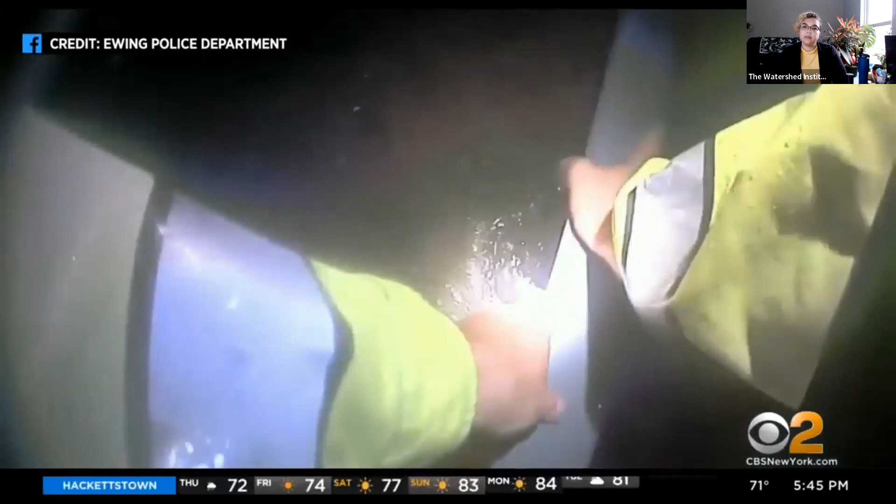Woman's life in the raging floodwaters last week. We showed you the body camera footage last night from Ewing Police in Mercer County. Now that officer is explaining what happened. CBS 2's Alice Gaynor reports. Body cam footage from police officer Justin Quinlan shows him walking through waist-deep water last Wednesday night at Whitehead and Ewingville roads, responding to a call of stranded drivers. He saw about 7 cars with people making their way out of the water and asked if they needed help. They said, no, we're all good, but that lady over there needs help. I didn't see her at first, so I'm glad that they were able to point that out for me. I shined my flashlight towards her, and I could see she was just holding on for dear life. He says he straddled the guardrail and made his way over to her. Hold on, dear. Don't move, okay? All I could think about was getting over to her and making sure I got my hands on her just to keep her in that place. I didn't want to lose her. Are you injured right now? No. Okay, swing your leg up over this guardrail for me.

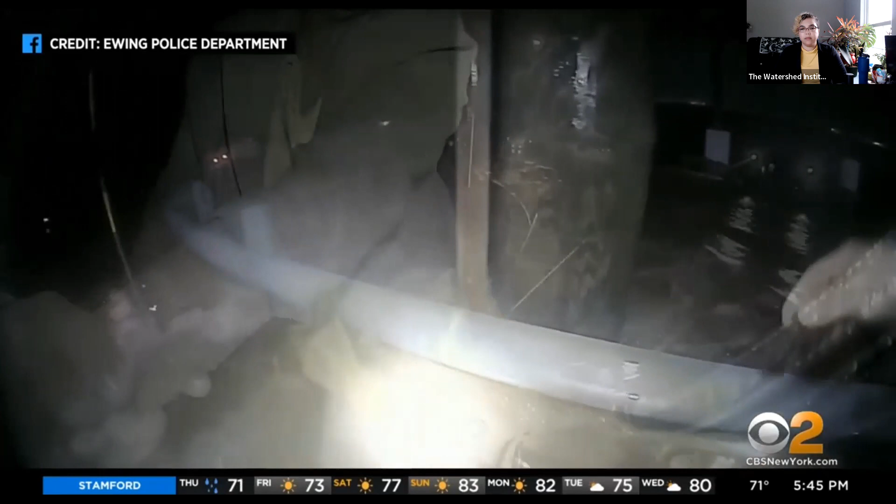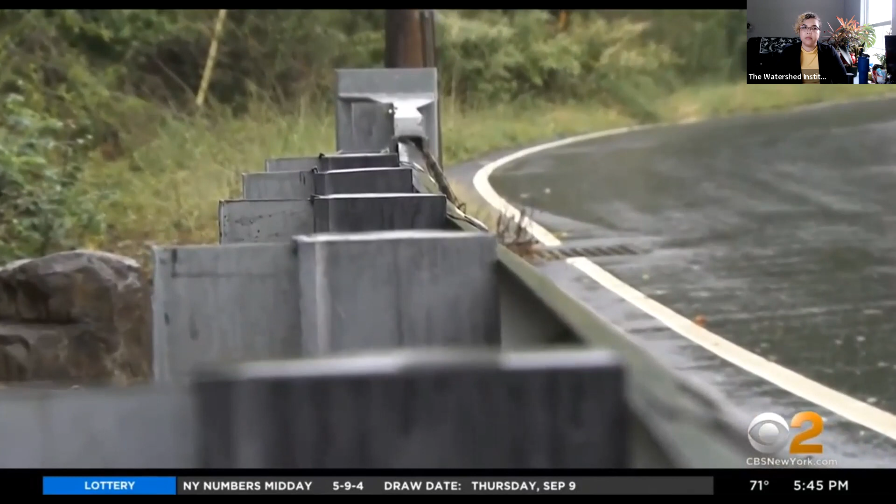Officer Quinlan says though he felt he could walk them out of the cold, fast-moving water, he decided to stay put and wait for firefighters. I don't know what's moving with this water, so I don't want to try and walk across, okay? God forbid there's a big log that comes loose or something like that. We said a couple prayers together and I just kept reassuring her that we're going to be okay. Someone's going to come help us. The body cam footage provided ends here, but Quinlan says 25 to 30 minutes later, firefighters came, put life vests on them, and used a rope. The woman, whose name he didn't get, was put into an ambulance to go get checked out. If she is watching or she's listening, I'm glad she's okay. Officer Quinlan also has this message to all drivers. When you see that water, it's better to just turn around. There's no point in trying to drive through it. He says he's happy the video shows the good side of police work, but hopes it also shows people why you should stay off the roads during a storm. In Ewing Township, Mercer County, Alice Gaynor, CBS 2 News. For more information on how to donate to Manville VF.

All right, I am going to share my screen once more. Bear with me as I deal with technology. There we go.

So I show this so that we can think about the bigger issues behind building a rain garden and taking care of our stormwater locally, that lives are literally at stake.

So Kendra, before you keep going, sorry, there's still a box kind of covering your slide. I'm sorry, friends. Just want to make sure that there's not a void of information. Thank you. I apologize.

So how did we get to this point? Well, technology, there we go. So in this figure, you can see observed precipitation changes from 1991 to 2012. The darkest green shows an increase of precipitation events of more than 15%, and the dark brown shows the opposite, a decrease of greater than 15%. Over this time span, our region is having a net increase in precipitation events.

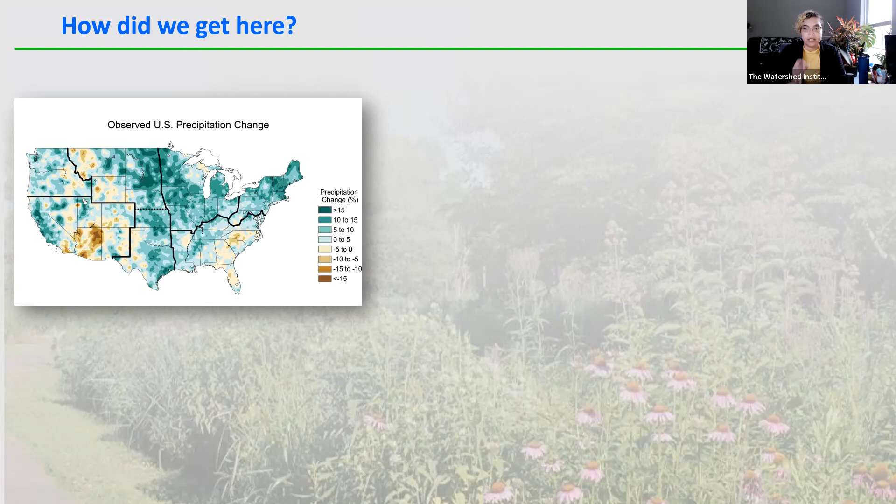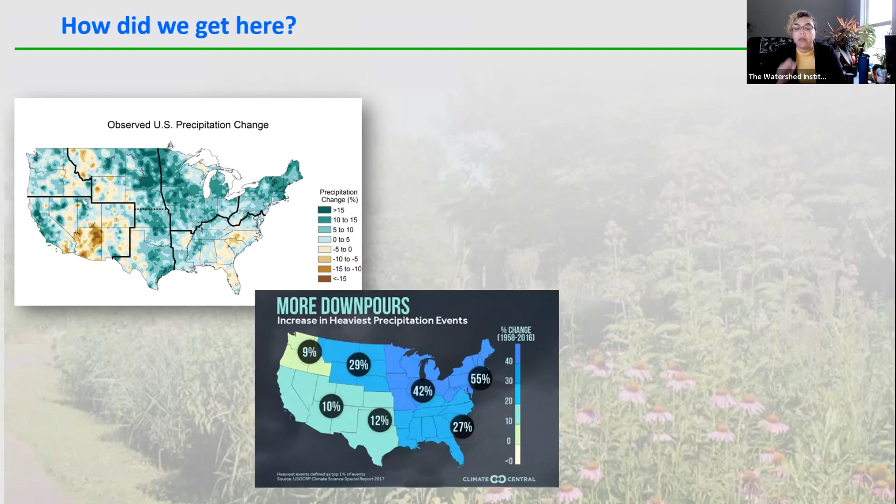Secondly, we're not only having more precipitation events, we're also having more heavy downpours in those events. So it's raining more often, and when it rains, it rains. And then finally, our land use has changed. So this figure shows changes in land cover from 1972 to 2010, with red being developed land. Developed land means more hard surfaces that don't allow water to penetrate. We call these surfaces impervious cover.

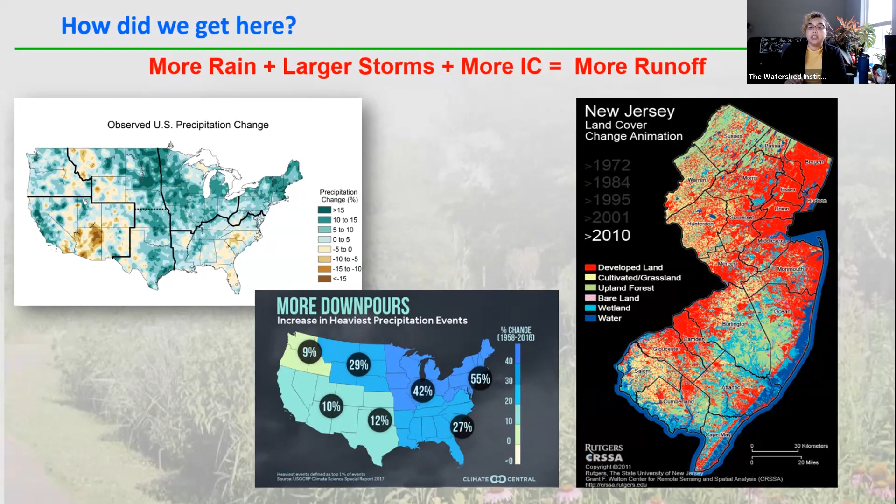Now, the result, more stormwater, and it has an increase in quantity. More stormwater, and as it increases in quantity, it gains strength and can cause serious flooding or stream bank erosion, which will destabilize the stream and provide less of a protection for communities nearby.

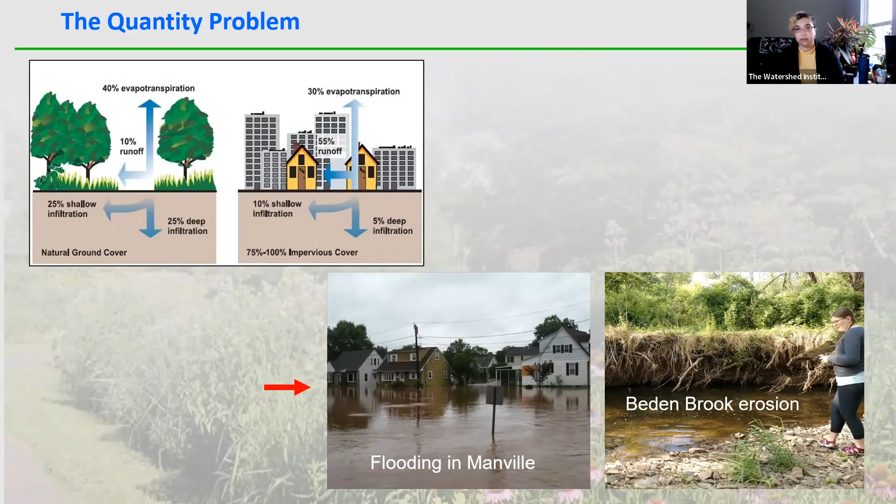The quality problem. The runoff is a collection of all the small solids and liquids that we release onto our roads, yards, home, workplaces, what have you. All of this is funneled together as stormwater, which is an issue not only for the health of the stream and the ecosystem, but also for drinking water, fish consumption, and recreation. In fact, most of our waterways aren't healthy enough to support various aquatic life, or we don't have enough data to make a conclusion about it, which is a different kind of problem.

And funny enough, that flows northeast into the Assunpink Creek and then eventually goes down and joins with the Delaware River. So Ewing is a special situation where it is an upstream community to those in Hamilton and Trenton, because what it puts in the water impacts them. But on the other side, it's actually an upstream and a downstream community when you're looking at the Delaware River.

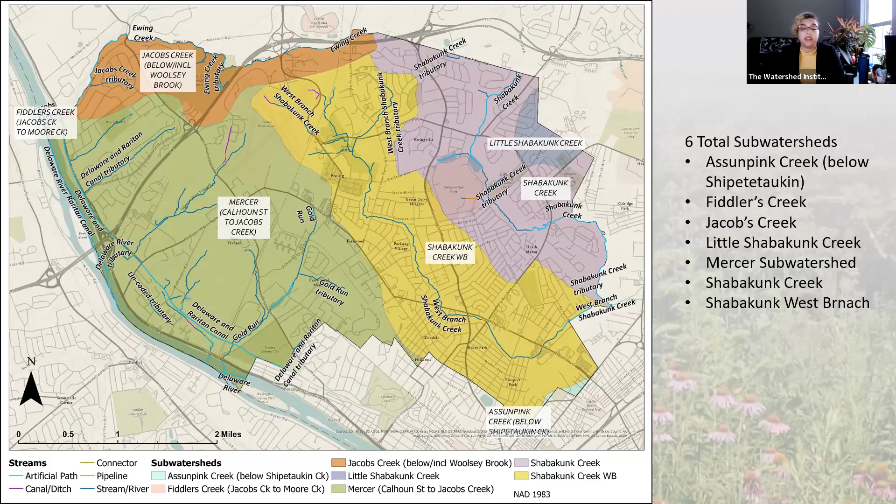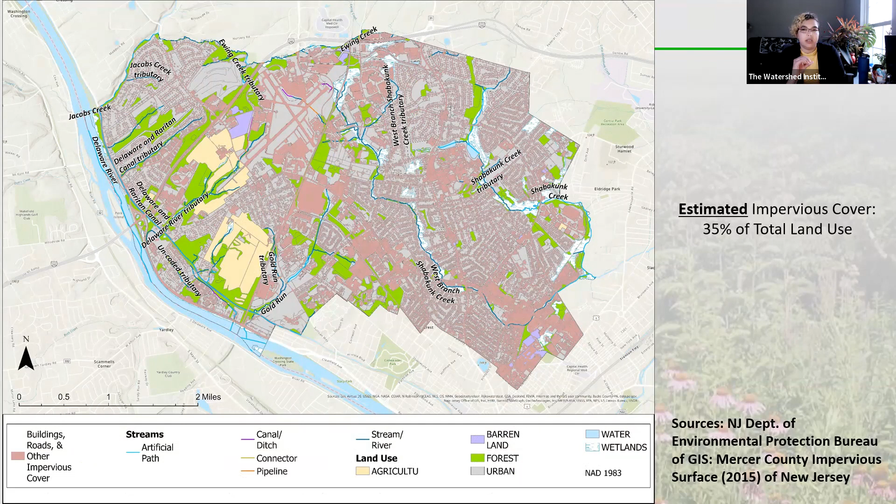So you want to be below 10%. That's where you are not having impact on the water quality or quantity. And as you go higher and higher, you go from impacted water systems to not supporting life. At the estimated 35%, Ewing is hitting the point where it's not going to be able to support the aquatic system.

All right, so how do we move away from this? Away from what we have here in our image, which shows our old style of managing water. Gray infrastructure, meant to hold water and do not much else. It's not going to address the quality or the quantity issue, but green infrastructure will.

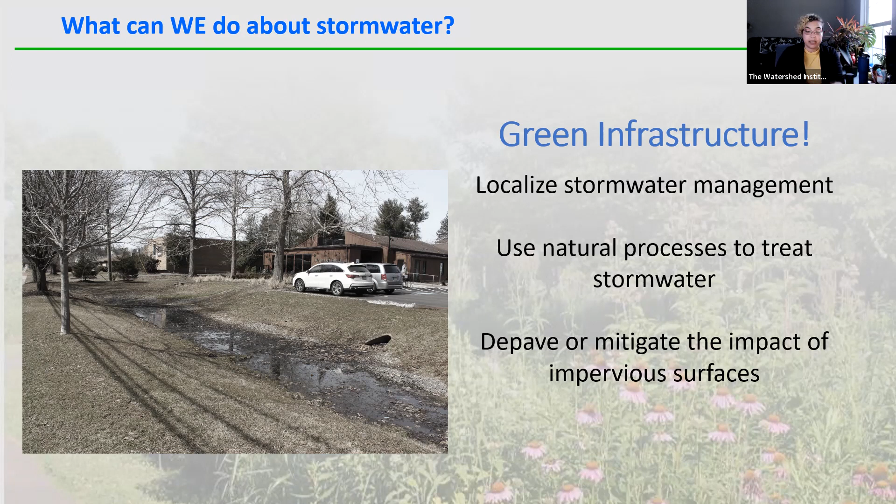It's a means to localize stormwater management, use natural processes to treat the stormwater, and it's steps to depave or mitigate the impact of impervious surface. So by working with the topography and utilizing local plant species that thrive in intermittent flooding, we can transition from a space like this to this.

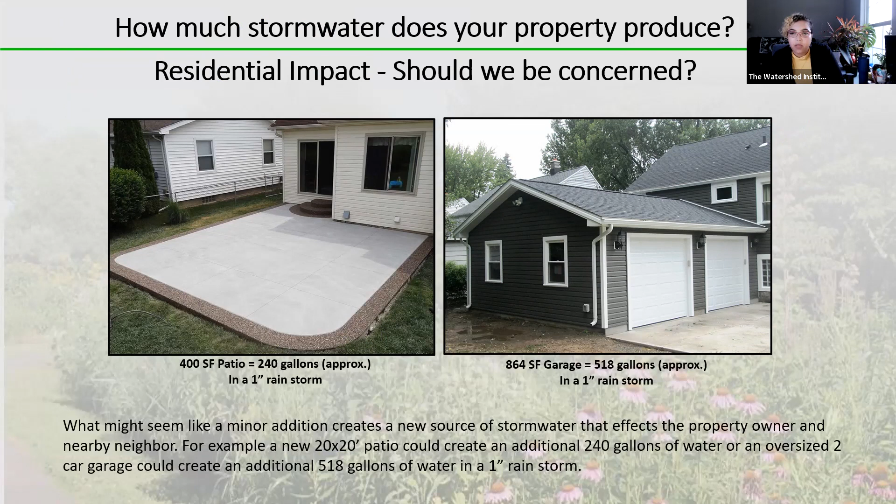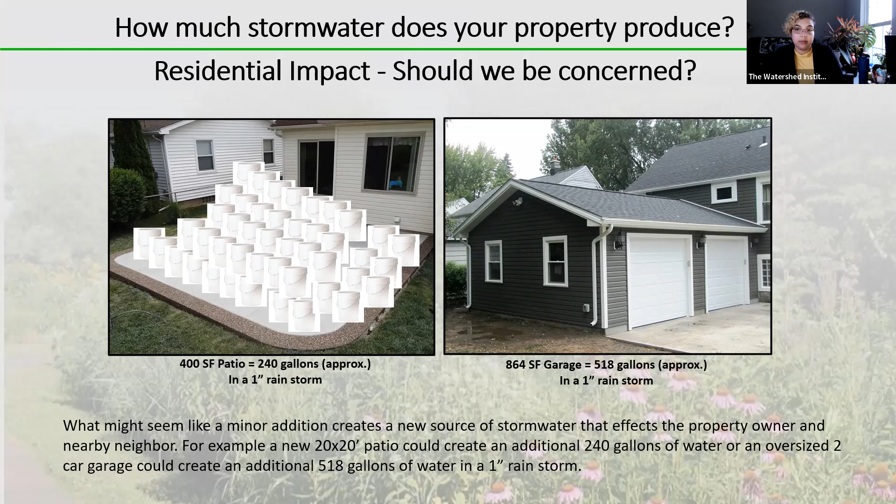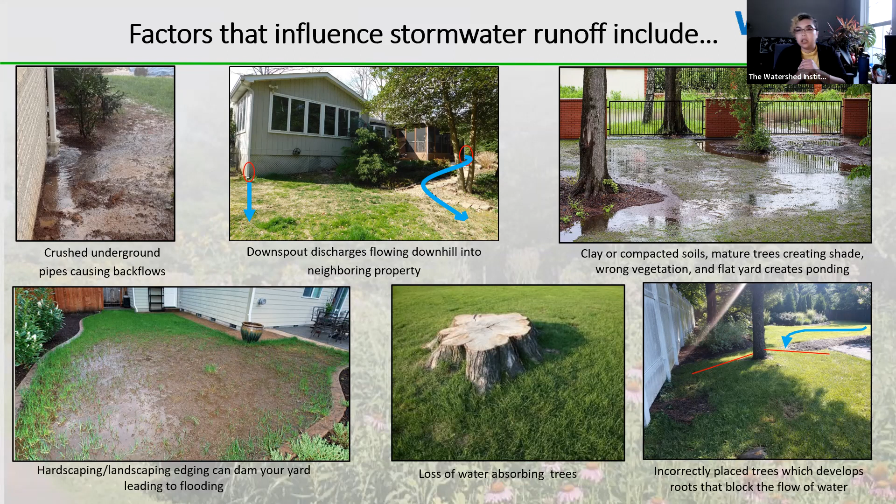And that's not the only issue that contributes to flooding. It's not just impervious surfaces. It can be things like broken or poorly angled downspouts that are causing ponding in your yard, compacted soils that refuse to take up the water and prevent it from infiltrating. Or you might be flooding yourself with landscaping that's edging up on the corner of your yard and holding the water in. Or maybe it's a loss of trees, so we no longer have those great sponges.

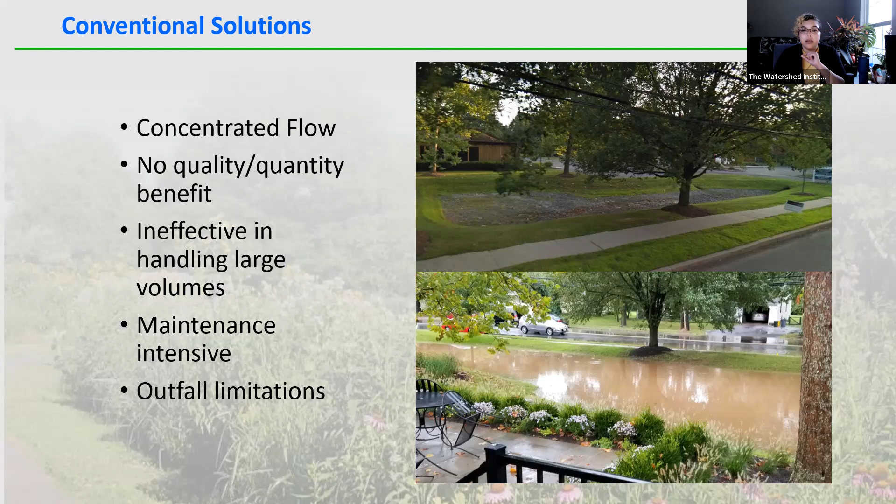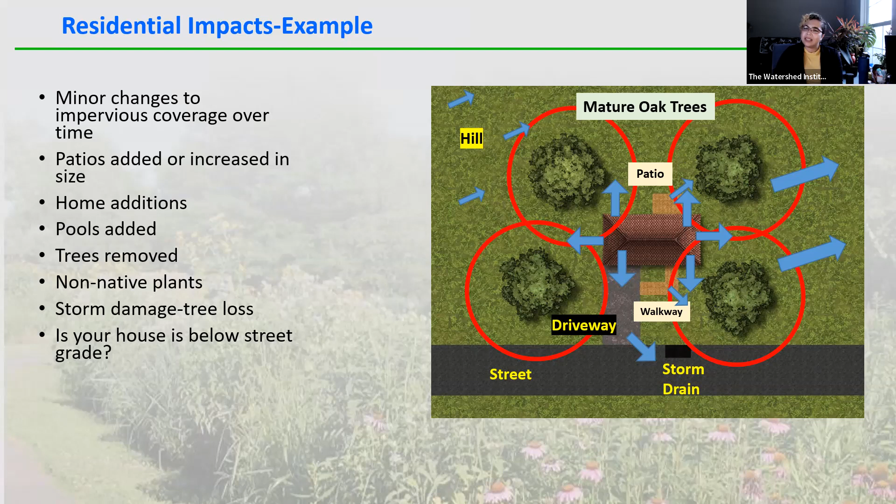And the total is 1,797 gallons of runoff because of this property in a 1-inch storm. But it all flows away from you. It all flows through downspouts. And in fact, let's think about those trees a little bit more. Because if you hop onto treebenefits.com, it tells you that those beautiful mature northern oaks capture just about 24,000 gallons of water each year. So all of them together are giving you 100,000 gallons of water soak-up, just as they're out there doing their thing. Little side note, the green ash trees absorb about as much as the northern red oak. We should consider what we're losing when we lose them to disease and pests in our area. Just my little 2 cents.

So things started to change. Your family started to grow. You were spending more time at home because there was an international pandemic. So you decided to build onto your house and improve it. So you added an addition. That's 1,600 feet. That's going to be another 960 gallons of stormwater. And then also you took out that tree because it was in the way. And you added a pool and a terrace. That's another 1,200 gallons of water. And then another tree had to come out. And if you have a pool, you got to have a pool house, right? So for 800 square feet, you're making another 480 gallons of water running off.

And with all that work you did in the back, it seemed a little weird not to do some sprucing up in the front. So redoing your sidewalk, you changed it a bit. So now it's 240 square feet instead of the measly 45. And now it's going to push off 144 gallons of stormwater. And unfortunately, nothing lives forever, and trees are included. And that tree in your front yard died to disease. So you managed to create 4,640 additional square feet of impervious surface, which translates to 2,784 gallons of water in a 1-inch storm, plus the loss of your 3 trees. So you no longer have those 75,000-gallon sponges in your yard. So what used to be a charming little house that basically took care of its own stormwater is creating a problem for those downhill in a very big way.

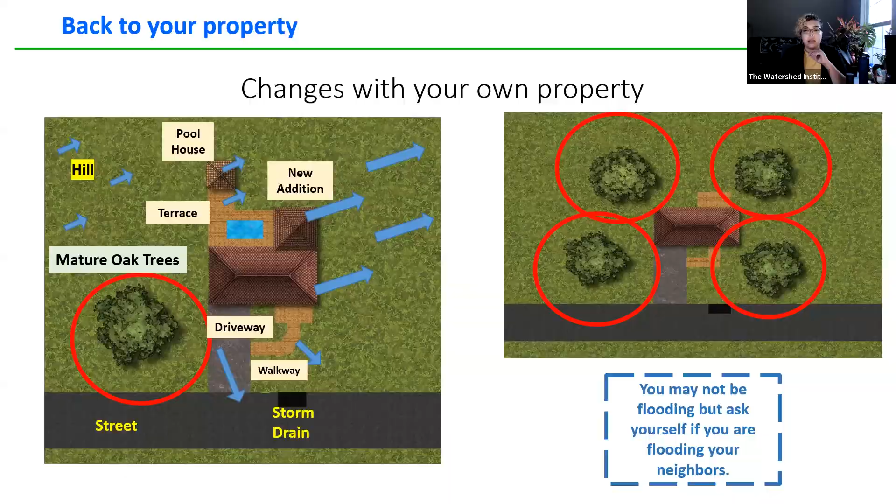So all of us contribute. This isn't a problem that's just related to warehouses, just related to developers, just related to people that want a pool and a pool house. It's all of us. This small 2,800 square foot roof in a 1-inch storm lays off 1,680 gallons of water. You would need 30 and a half rain barrels to hold this in a 1-inch storm.

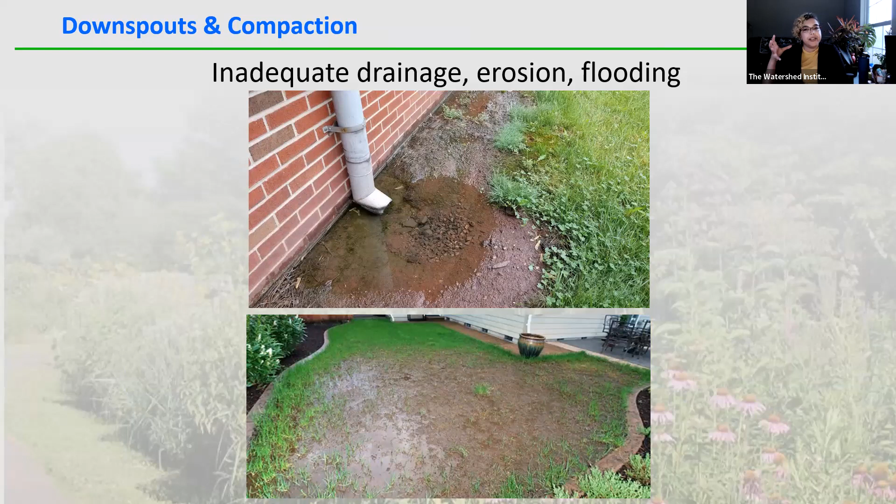In fact, a lot of our downspouts aren't pointed in the right way. So sometimes we're flooding ourselves as we lead to ponding, or we're damming up our own yard with landscaping, causing the water to stay in. So some of it is not about the impervious surface, but the layout around us.

So there's lots of things that can affect stormwater. All right, it's your drainage areas, the total amount, precipitation, land cover, but issues like your type of soil, your slope, the type of flow, whether it's a strong sheet flow or concentrated, those all are going to have an impact. So the importance is everybody making that effort. And you all are taking the step right now by learning about rain gardens.

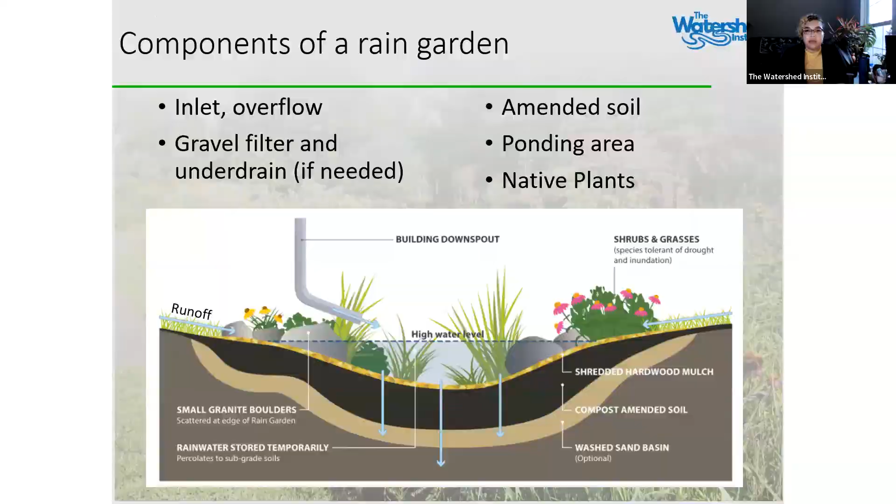So I want to take a little bit of a breather, check the chat for any questions, and say thank you for your time. All right, so. Looks like we do have one question. Yeah, so, oh, and I want to be on my question slide.

So, all right, so are there types of hardscape that produce less runoff, like pavers with spaces in between versus solid cement? Yes, there are options. Obviously, the more you have something that can allow the water to infiltrate, it's going to be better. There's lots of green infrastructure related landscapers that can help. While Olivia presents, I'm going to try to find a quick reference and drop that in the chat that can talk about some of the different types of impervious surface and pervious surface alternatives.

And like everything with this, there's going to be a compromise. There's a reason why humans have structured it so we have these hard impenetrable surfaces for roads and roofs, but it's time to consider alternatives.

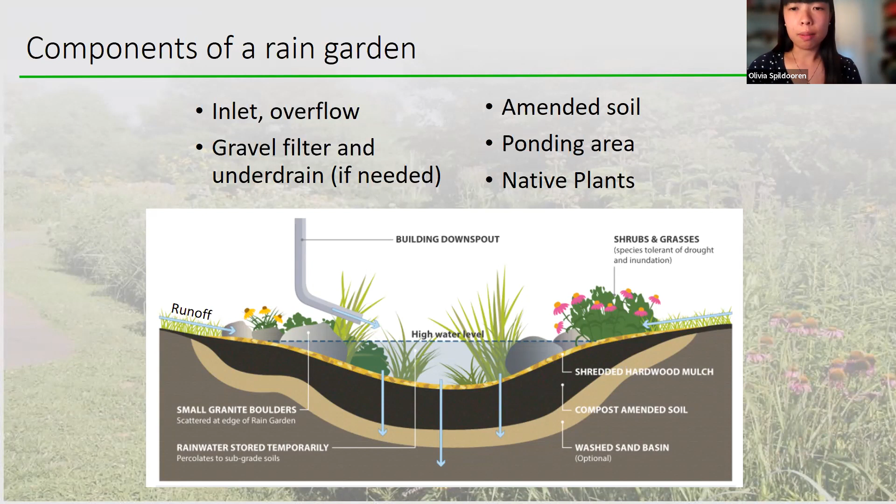Actually, not finally. So we have the rain garden plants, which I'll talk about more in future slides, but you're also probably wondering, it says high water level and what that means. You can kind of see where that water level is. It's the whole section of the garden that is exposed to the elements, and it goes to the deepest part of the garden. And this area is supposed to drain within 72 hours, so about 3 days, to avoid problems with stagnant water like mosquitoes. And the maximum ponding depth is usually around 6 inches, but we'll talk later about how that also depends on your soil type.

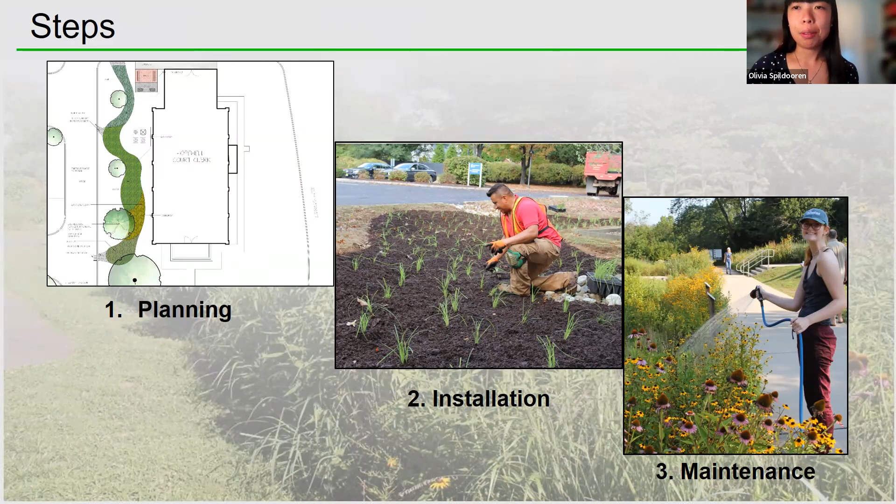So that diagram might have been a little intimidating or daunting if you're thinking of starting a rain garden project on your property, but I'll assure you that it's much simpler than that diagram. And there are 3 major steps involved in the creation of a rain garden. Each one we'll go over in some greater detail. So we have planning, installation, and then everyone's favorite, but also the most important, maintenance.

So first, in the planning stage, Kendra did a good job of giving some examples of homeowners' dilemmas that have happened, or just giving an overview of where the water is running. But obviously we're not above the ground. We're not like birds. So we have to walk around during a rainstorm, get your rain boots on, get an umbrella and see where that water is going. This is a really critical part because you can't decide the best place for a rain garden without knowing where the water is going to flow.

So first, where do you see it going? Where is it coming from? That's also a really important thing to note. Follow it. Is it ponding in your yard somewhere? Is it actually flooding your neighbor? Or like Kendra said, also, are you flooding yourself?

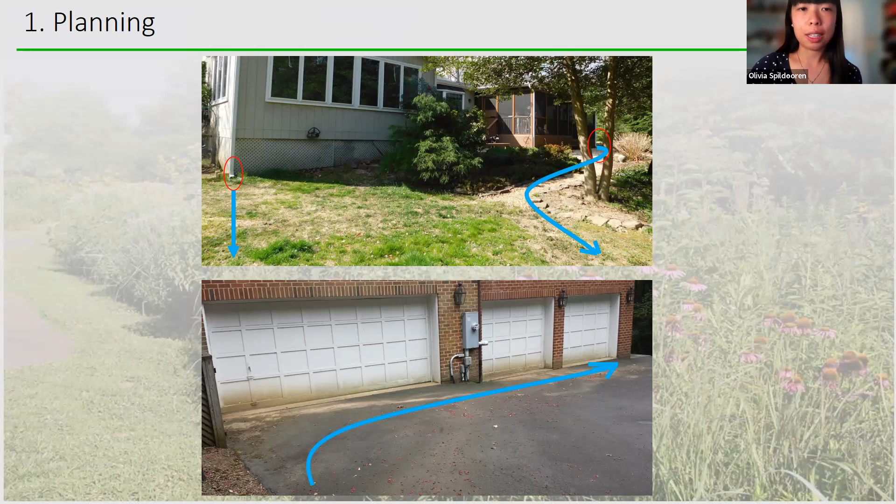So this is a picture I think she showed before. The top is a home that is flooding their downhill neighbor. You can see where those arrows are going and where there's some erosion in the turf grass. And this is actually coming from the homeowner's downspouts, creating this kind of river that is flooding their neighbor. And then the second image is of a house that's being flooded by their own stormwater, which is flowing down their driveway from their house and right into their garage.

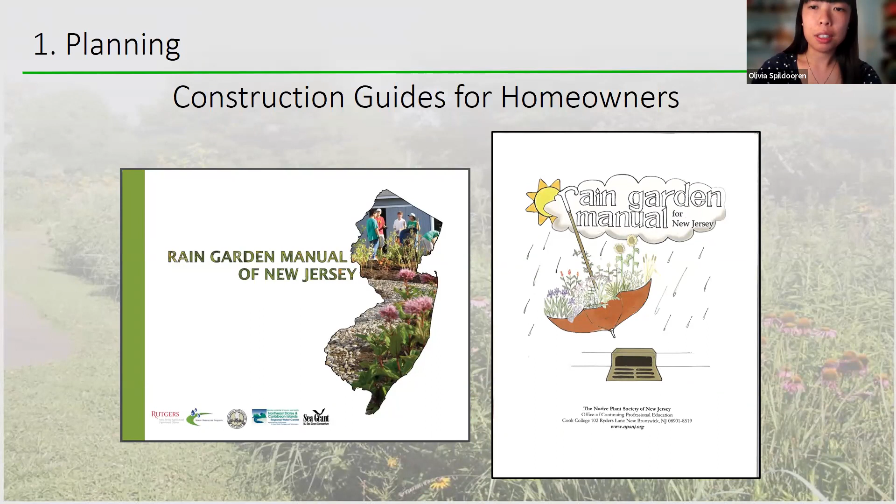So once you follow the water, know the source and the spot of where the water flows, it's time to refer to some manuals to start preparing. You can use Google to find either of these manuals online in virtual form. They basically tell you the exact same thing, but have different illustrations, both of which I think are very helpful. One of these is created by Rutgers, and the other is by the Native Plant Society of New Jersey.

You'll want to make observations to determine where that water is moving. And also you'll want to focus on where you're going to be most concerned. Because as you saw in those diagrams, the water from the 4 directions that your house slopes is all moving down, but you need to find the area you're most concerned with.

And you'll also want to think about when you install your rain garden, again, the direction of the flow. I mentioned an inlet and an outlet of the garden. So you want to make sure that the water is mostly going into the inlet, is able to be collected and absorbed in the rain garden, and then any excess is outletting either downhill or somewhere else where it won't be causing issues for yourself or other people.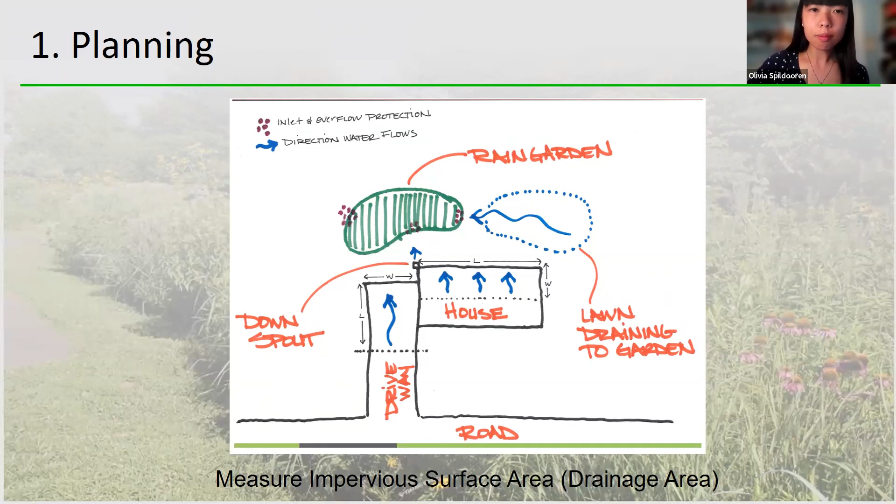Then refill the empty hole again with water and measure the depth of the water with a ruler about every hour for at least 4 hours to see how many inches of water are drained. About 1 inch of water draining per hour is an indication of good soil for a rain garden. If all the water does not drain in 24 hours, the site might not be appropriate for a rain garden, or the soil will need to be amended. As most of us in New Jersey have heavily compacted clay soils, you will most likely need to dig down deeper and have amended soil that has been specially created for the rain garden.

Also, you'll want to research if you have a high water table. So if you dug down 1 foot and it was muddy already, a rain garden might not be the best, because we don't want it to be interacting directly with the water table. So in that case, you might want to plant a vegetative swale, which is more like superficial grasses that have deep roots to do the infiltration work, but we're not digging down into the water table.

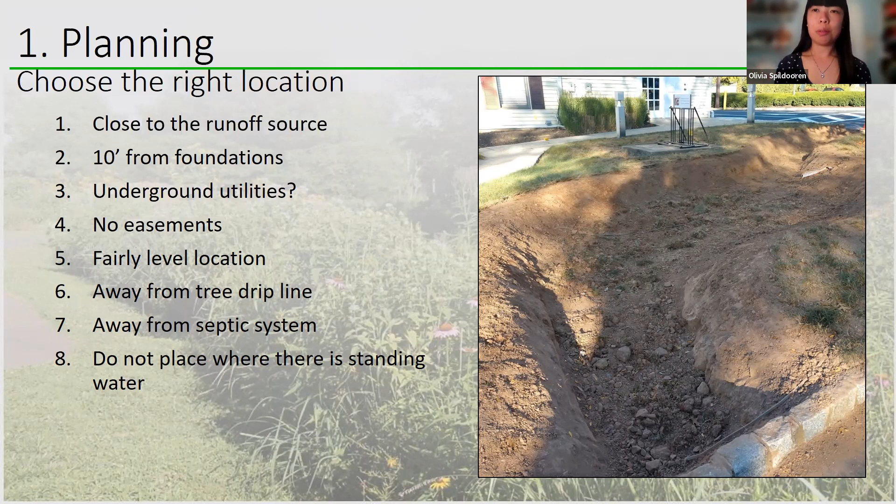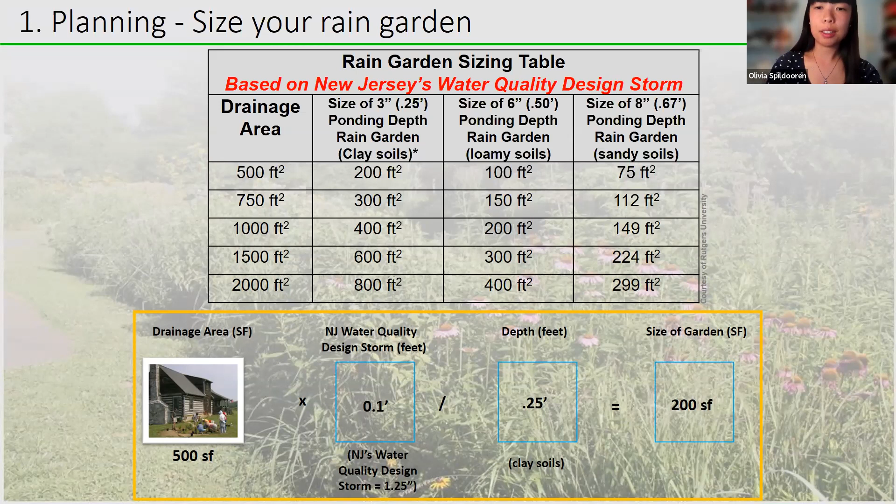So those are all the numbers we need: 500 square feet times the 1.25 inch design storm, and then accounting for the ponding depth of the clay soil, we find that their garden should be 200 square feet. The manuals that I mentioned before can tell you how to do this pretty simply. You can do a quick Google search, or you can ask a professional to help you if you are really concerned. So the next step of this rain garden tour is getting shovels into the ground for installation.

So once you have dug the hole for your rain garden, you have a few options for soils. One, you can mix your own based on results of a soil test that you can get done by Rutgers Extension Program, or you can buy pre-mixed from a supplier such as Rutgers Landscaping or other landscaping companies. You can make your own custom mixes, but from experience, I found that it's easier to leave it to the professionals when dealing with what percentage of soils to add. It can also add up pretty quickly, just in bulk volume of how much sand or compost you need. And if you don't have a lot of space to be able to mix that thoroughly, it becomes a real hassle.

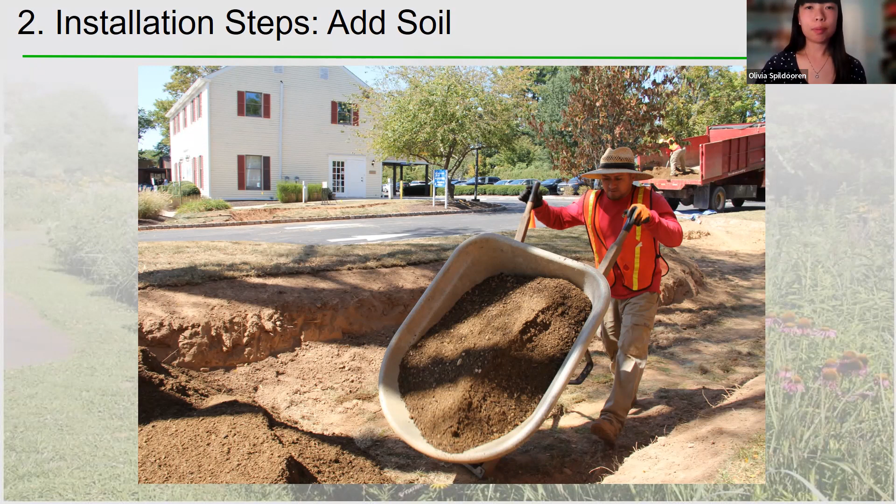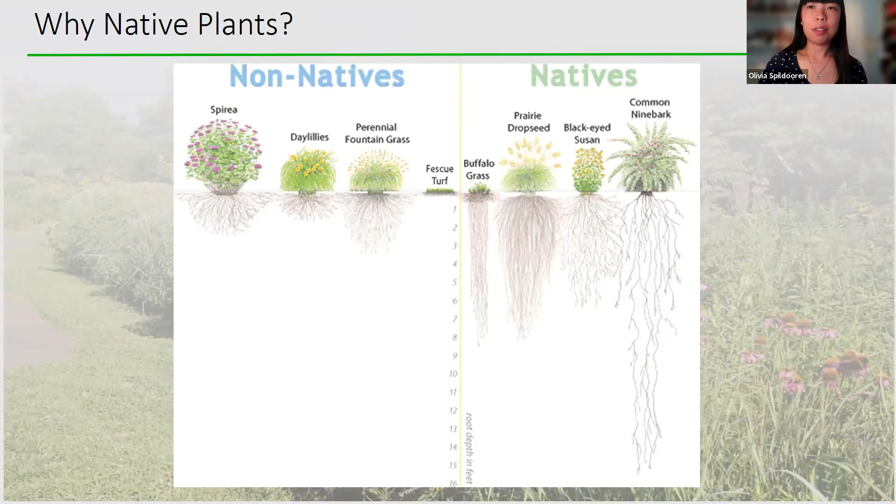You can purchase native plants at many garden centers, or you can go through specifically native plant growers or distributors. That's what we prefer at the Watershed. And you should be wary at garden centers of tags that say native, because they aren't always native to New Jersey. That is not a regulated term. So if you have questions, always happy to answer them at the Watershed Institute.

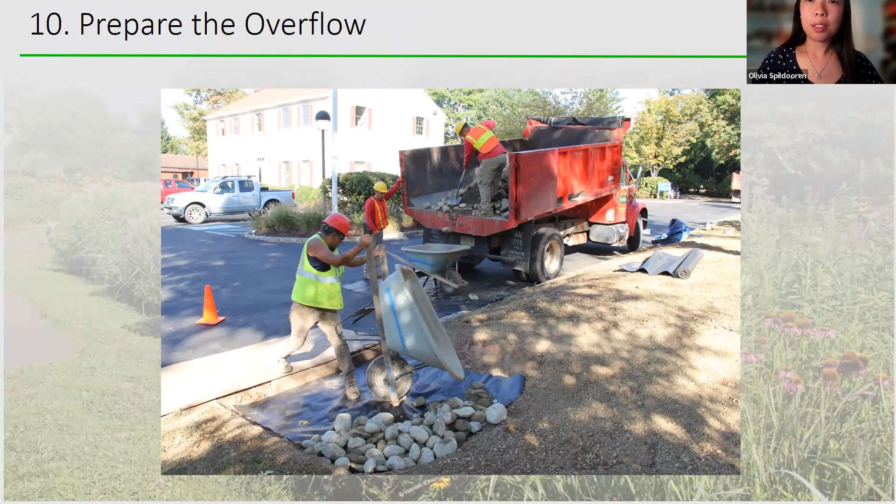Next, we come to step 3 of the rain garden process, which is maintenance. Rain gardens in general are relatively low maintenance, but do require some occasional attention, especially in the first 2 years after installation. So this is not a plant and forget type of thing. It's kind of that after 2 years, but even then it still requires a little TLC.

So in the first few months of installing your rain garden, you'll need to water your garden pretty regularly to ensure the plants are able to become well established. They typically need to be watered for the first 2 years, at least an inch of water per week. And once established, the rain garden may need to be watered only during drought conditions.

In addition, for maintenance besides watering, you should inspect your rain garden prior to the growing season and at the end of the growing season, see what's doing well, see what's not doing well, and also after large storm events or extreme weather conditions to see how it's handling that.

If you notice some erosion after heavy rainfalls, you might need to build up berms or plant more grasses or sedges that can help keep that soil in place. And to slow down the flow of water in the garden in case gullies are forming, you can add berms or grasses to the area.

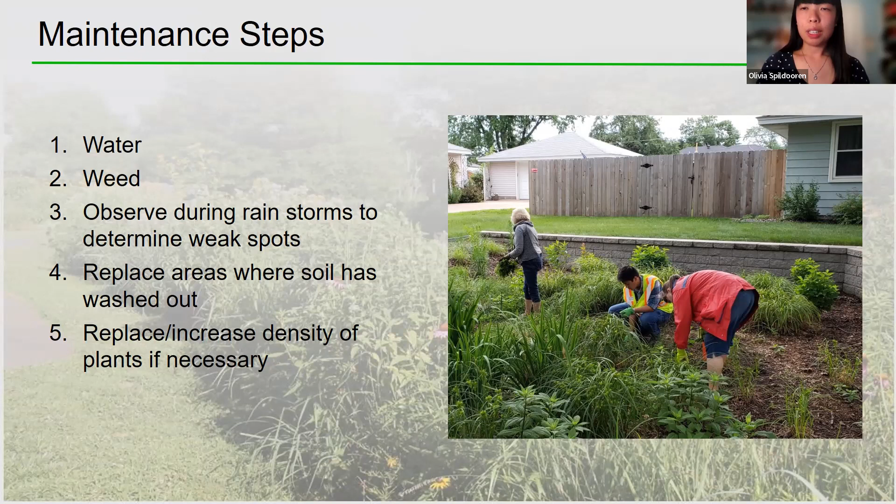And a pro tip, start from the beginning by spending the extra money and planting densely. Kind of like in this picture, you're not seeing much open bare soil, which not only squeezes out open ground for weeds, but also helps with that infiltration of water and not having to deal with erosion in the first place.

So everyone's common enemy are weeds. You want to pull them out before they take hold, but the issue is that it can be very difficult if you're a beginning gardener, even seasoned gardeners. You can't know what every plant looks like, and especially at the beginning of the growing season, like right now, things sprouting up can all kind of look the same.

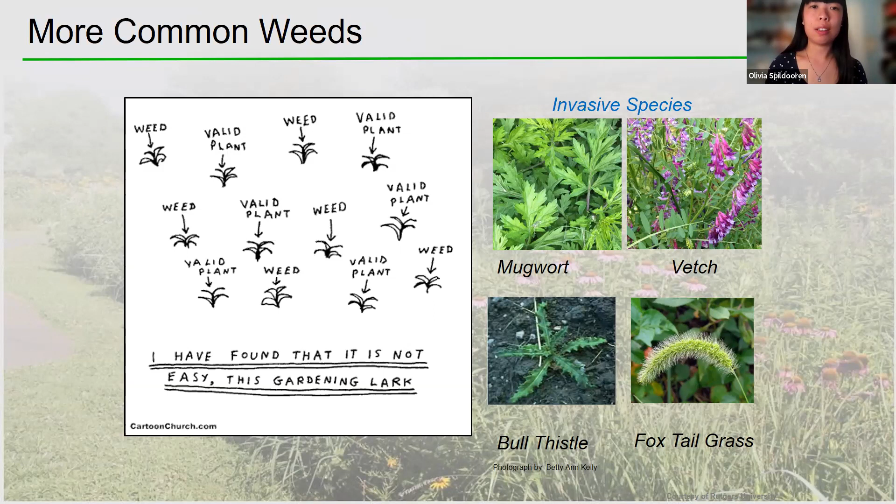So you want to make sure you plant simply. I recommend 3 to 5 plants. 3 plants are usually the best, so it's easy to identify what the plants are you want and what are weeds.

Next, native grasses and sedges are great to use in rain gardens because they slow down water and prevent gullying, and their deep fibrous root systems help recharge groundwater. Leaving these plants tall in the winter months provides interest in the garden, but they do need to have some maintenance once a year. You should mow them down.

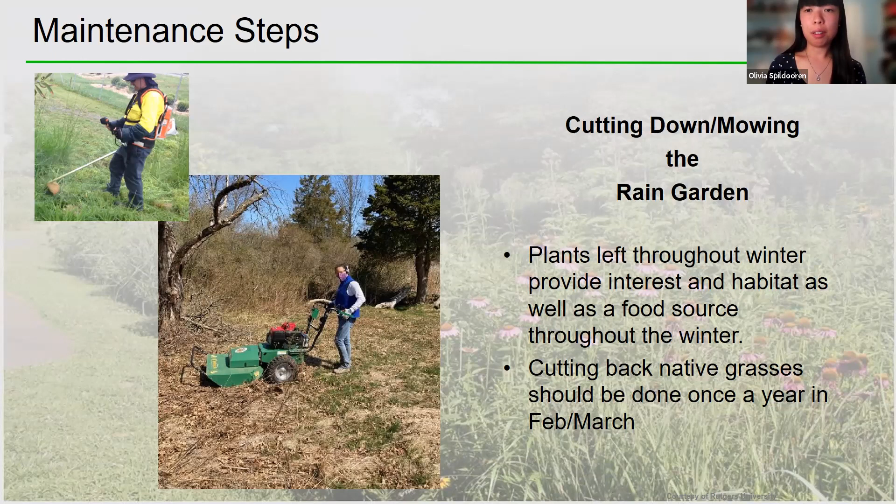Ideally, mowing or cutting down should be done before growth begins in the spring and wildlife begins to return. So probably not now. Right now would not be a great time as things are starting to come out, but about a month ago or a little earlier would have been a great time for mowing down the native grasses.

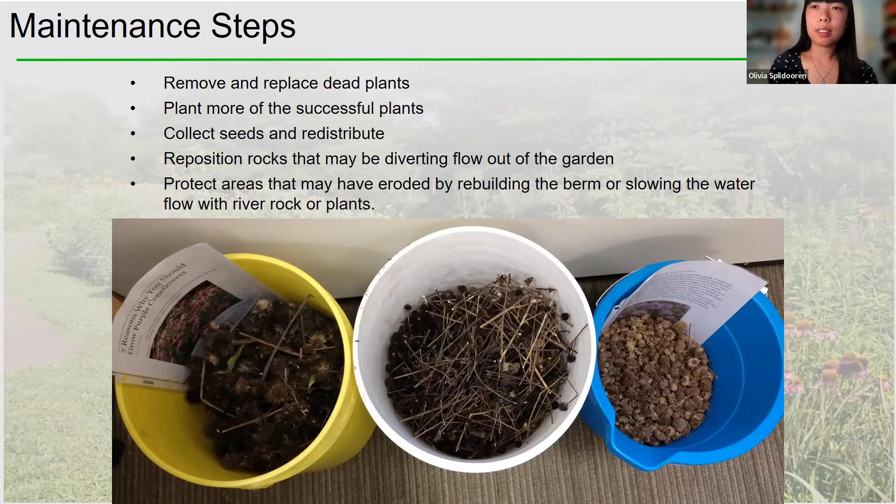Some other maintenance steps are removing and replacing dead plants, replace them with things that have been successful. For plants that have been successful and create seeds, you can learn how to collect those and redistribute them around the garden. Make sure to reposition rocks to divert flow in the garden and protect areas from erosion with the various steps that I mentioned before.

Will my rain garden cause flooding? The short answer is no, not if it's sited and built correctly. That's why these steps of planning and installation are both really important.